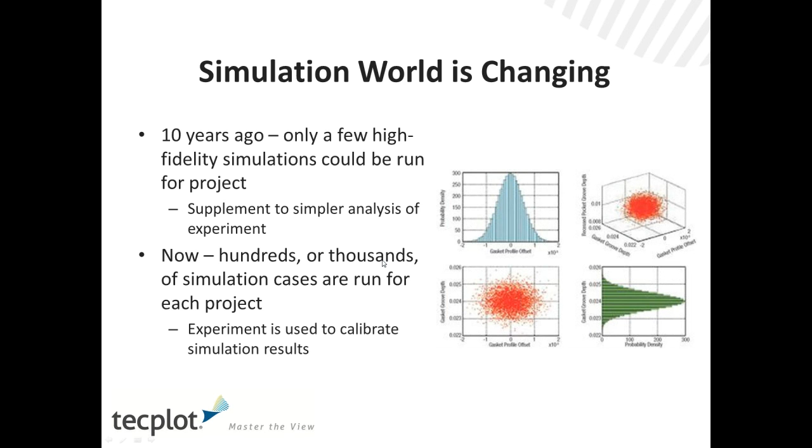And this poses a very different problem to what we've been dealing with in the past, because we grew up with a different paradigm, looking at one result, and trying to apply those basic constructs to aggregates or ensembles of results is something that's somewhat new. And that's an area where we've been doing a fair amount of work to try to see if we can help make that process more facile.

So in that context, there's really been two main applications of the simulation that we're speaking about today. The first is more production-level CFD. In production-level CFD, what we're seeing in the industry is primarily around performance prediction and/or optimization. So in this context, a lot of people are actually trying to predict performance of a vehicle in advance of building it, with the idea of saving a lot of money as one can make some design decisions early on in the process, which have huge implications downstream when you start to think about the overall project costs.

So in essence, what people are doing are looking at velocity spaces, configurational spaces, to get flight characteristics or to get performance characteristics of any type of vehicle, which is slightly different than perhaps exploratory CFD. Now, in the context of exploratory CFD, we're really looking at people who are trying to optimize conditions to get a very accurate solution. This could be anything from evaluating CFD codes, code parameters. We have seen a fair amount of people doing grid resolution studies as well.

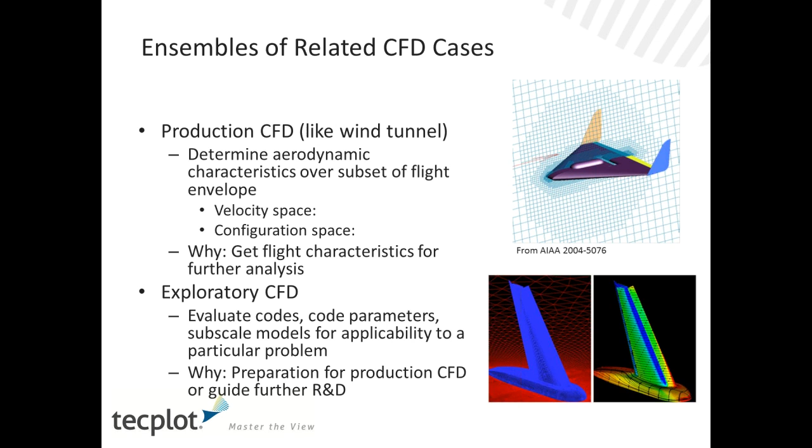The big difference between the two is that in the context of exploratory CFD, although there are several results one might be looking at, you're really trying to do comparisons of accuracy around a given set of initial conditions, or a smaller set of initial conditions perhaps, than what you might be doing in production level CFD. But the end result is you have tons and tons of data. What we want to help you do is pull out the data from all of the information that you have. It's really those needles within the haystack that help you understand how a system is performing. And that's really the goal of what we're going to talk about here this morning.

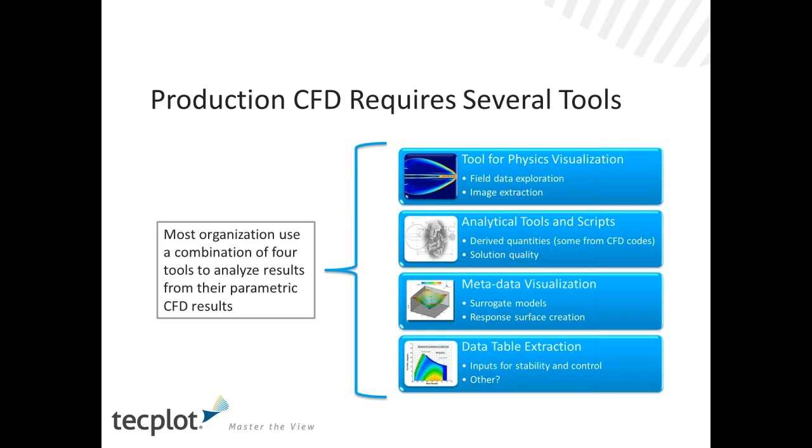So this is kind of the way people are applying it today. We've been thinking there's got to be a better way. So we've developed an application called Tecplot Chorus. And Tecplot Chorus is a framework to manage CFD projects with multiple simulation runs, with tools to evaluate the resulting metadata, and I'll actually walk through this.

But the three main components, physics visualization, analytics around metadata, and project management, are really the cornerstone, so to speak, of what Tecplot Chorus provides. So really in the context of simulation analytics, which is the coupled analysis of detailed flow fields and the associated metadata or integrated quantities and other descriptors. And those consist of anything from visualizations to data management, statistics, and data mining. We'll try to touch on each of these pieces as we go through.

So the first thing we're going to talk about and actually demonstrate and walk through in our two use cases will be how to create projects directly from raw simulation results. We'll show you that it's very easy to bring that information together. And in our use case, we'll walk through one starting from raw results directly from a table, and the other will be actually from a set of directories where the data live.

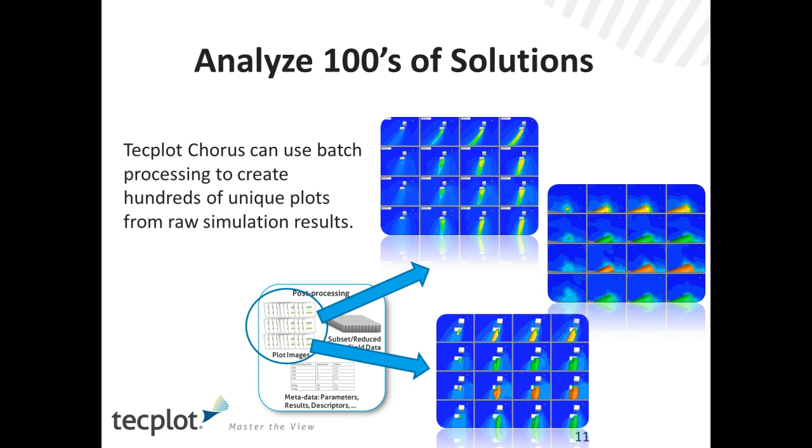The thing we're going to show you is that once you are dealing with those aggregate solutions, those ensembles can be analyzed like they were one, but you can do that on 100. So that allows you to be much more productive, and I'll show you that it's relatively simple. You can actually go through and do that.

And then finally, or probably most importantly, is comparing those results, both qualitatively and quantitatively, to understand effectively what the differences are. And you can see that ranges from doing simple visual comparisons to qualitative image differencing to ultimately looking at quantitative differences of the actual CFD solutions. We'll walk through a couple examples of that as well.

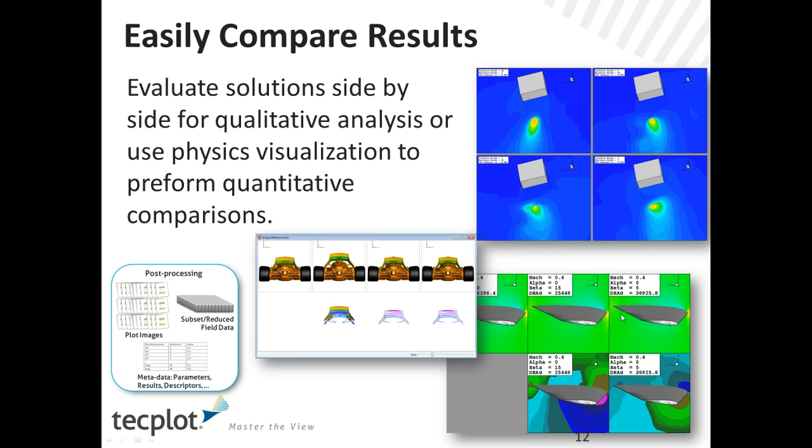At the end of the day, though, you want to tie back to the integrated quantities. Those integrated quantities typically are going to be around using surrogate models as well as response surfaces, and ultimately being able to take that information out into a table that then could be shared with an additional group.

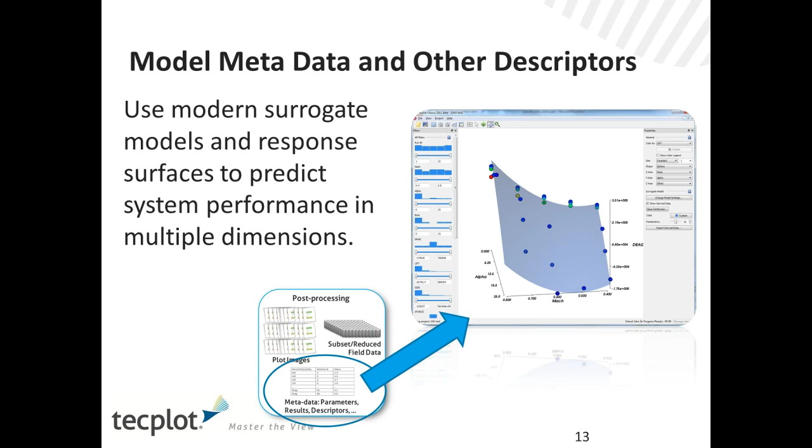So basically what Chorus is going to provide, and I'll show you in this example, is the ability to tie together physics and integrated quantities into one environment so you can make a decision based on holistic information. And it's that ability to understand what's driving the physics that allows you to make a better decision.

In effect, it's like having a hyperwall on your desktop. And for those of you, perhaps, I think we have a couple from NASA. In effect, Tecplot Chorus provides a mechanism to do much of the work you might do with a hyperwall like out at NASA Ames. And we'll show you that you can actually evaluate sets of results very quickly on your desktop.

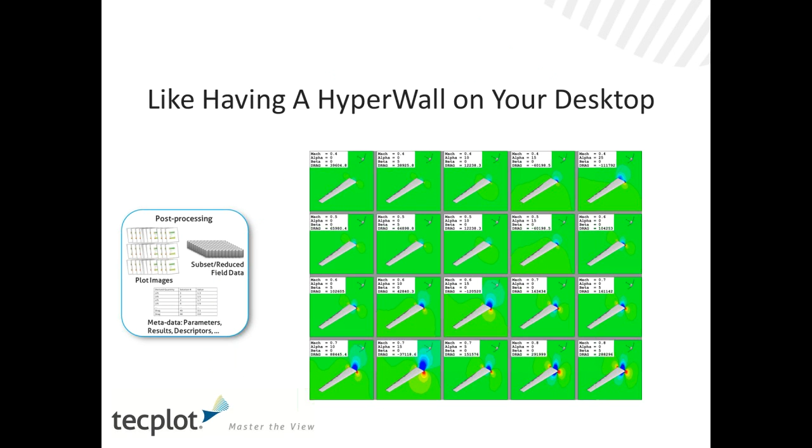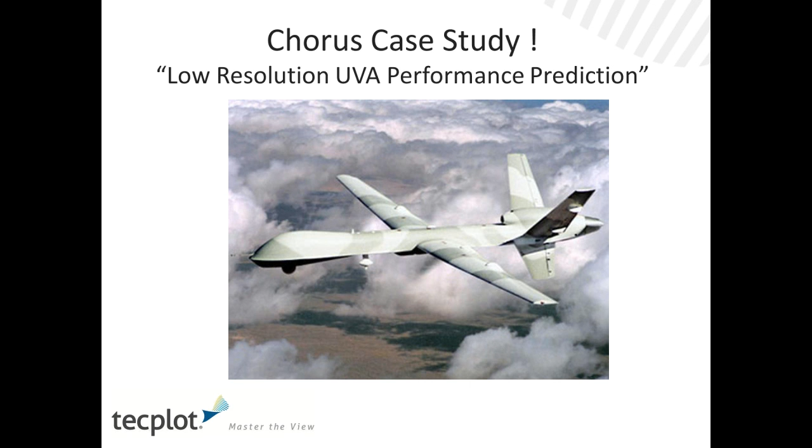And our first use case is going to be looking at a low-resolution UAV performance prediction study. The primary thing we're going to be looking at here is to understand things like alpha max, and we're also going to be looking a little bit beyond its flight envelope. We're going to be looking at higher speeds than this particular vehicle will fly, but you can start to understand what the net impact of trying to fly at those higher speeds will do.

So the background on this, we really are looking at high-fidelity simulation, although the resolution of this particular mesh was somewhat low. But using high-fidelity simulation to predict performance early in the design process has been shown to save quite a bit of money. So as organizations look to computational resources as a mechanism to, in effect, drive some of their design work, they're trying to use these high-fidelity methods early in the design process.

Now, as engineers, of course, we need to develop methodologies that the design team can use to test these potential configurations. So the tools and processes that we're trying to develop in this case are around how does one analyze a set of information to help understand and drive perhaps this performance. And this is one of the reasons why we've seen such an increase in the number of simulations in a given project, because people would like to be able to do some initial performance calculations prior to even making a final decision on design.

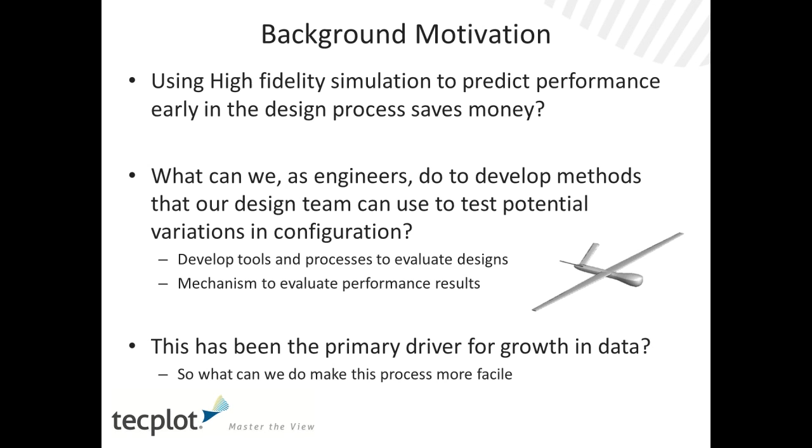So the data, as I'll show you very quickly, we're looking at about 34 cases, each related to the UAV I show you here. I actually have it upside down, but I wanted it to look a little bit more like the image. And what we'll be looking at are the integrated quantities, lift and drag, and we'll actually be trying to model the drag surface. So the summary, we're going to show how it's relatively simple.

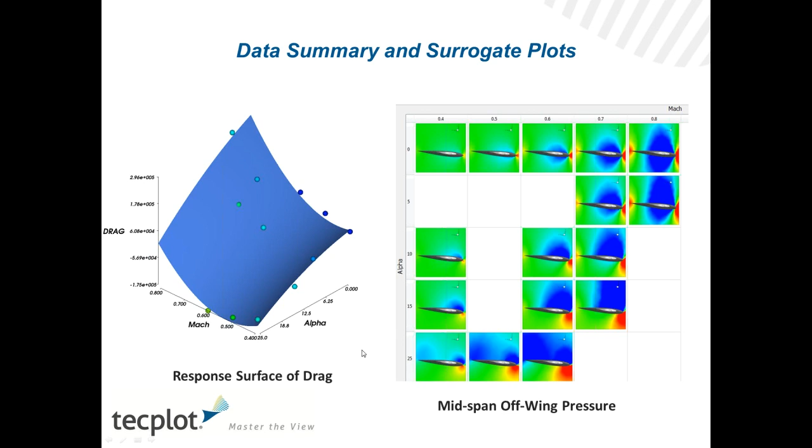We're going to pull together the information into a project. We're going to analyze the results by creating a series of visualizations and other analytical strategies to evaluate system performance. And ultimately we're going to show you how easy it is to actually create a report.

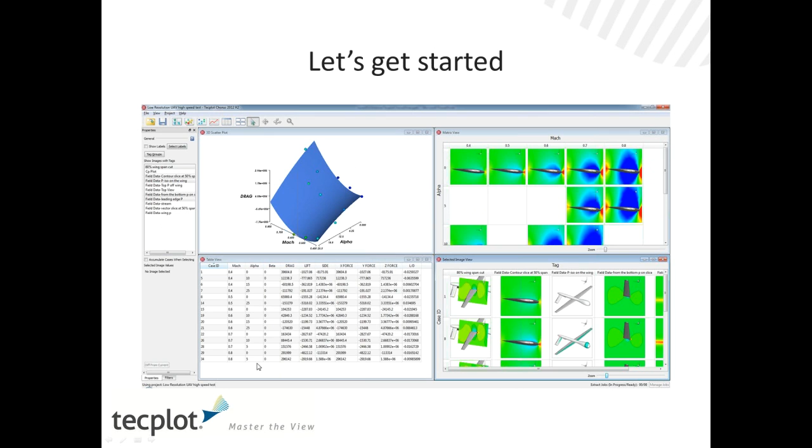So we'll create a project, we'll develop some assets for comparison, identify key characteristics like alpha max, and then we're going to show how you can create a report. So let's go ahead and get started. And with that, I'm going to exit PowerPoint momentarily, and we're going to go into the actual use case.

Now, some of you may have faster or slower bandwidth, so I don't know how quickly this is going to update, so I will try not to go too quickly. As I said, the recording of the actual use case for both of these will be available shortly after the webinar. You'll be able to go through then and take a look at each of these, and if you want to go in more detail, there's a little more detail in those walkthroughs.

So the example we're looking at here, you can see we're looking at Mach numbers that range from 0.4 to 0.8. And for each Mach number, we're looking at a series of alphas from alpha 0 to alpha 25. And within each alpha, we're looking at betas from 0 to 15. So it's not a true orthogonal array, but the basic concept is similar. And for each one of these, we have a volumetric solution, a relatively small volumetric solution in this case.

The idea here is that for any one of these, one could access the data and analyze it using Tecplot 360 for physics visualization. And what we've seen in the industry, and for those of you who perhaps have seen some things on Chorus before, is that for the most part, people analyze one, perhaps drop in a slice, look at the pressure, and then say, okay, that's my basic view, and then they'll try to write a macro that effectively would do this.

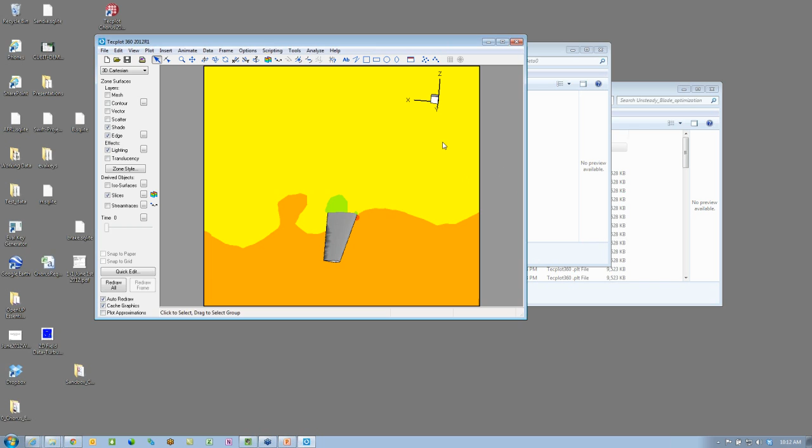And doing it in that method can really lead to some issues around path and other dependencies, especially if you're running on a Linux system. If you don't have all the dependencies in your script taken care of, when you try to run it again, it may not work. And so we're trying to address how one can work in a smarter way with Tecplot Chorus. So let's take a look at this system, and we're going to start by creating a project.

And the project that we're going to create here is going to be based on, let me just move this over, the data we were showing you just a second ago. I'm going to create a simple file to put the information in, and we'll call this 22 here. Doesn't really matter. And the project, we'll call it low-res UAV. And we're going to use a file crawl, and we're going to browse out to the directory. The directory is on my desktop, and this is the same directory we're looking at.

And the next thing we're going to do is identify those independent variables. Those are the initial conditions. You can see we have Mach, alpha, and beta. And I'll very quickly just pull that directly from the directory structure. Now, you don't have to do this, as I'll show you in use case 2. You can actually have an index file as well. So it really depends on how you set up your project. Gotta make sure we spell that right. And then we'll take beta as well.

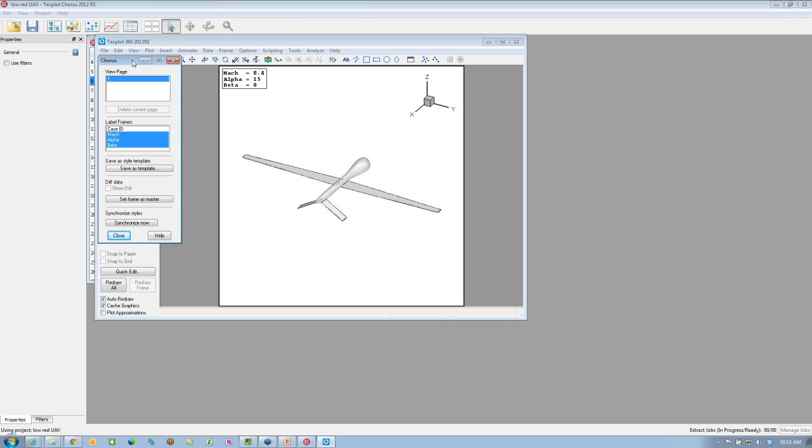And we'll bring in that raw data, and now we can operate on one as if we're operating on all of them. So as it loads in information, you can see that we have links back to the independent variables. And if we apply a simple style to this, perhaps adding a slice, let's see, why don't we put a slice close to the nose cone here.

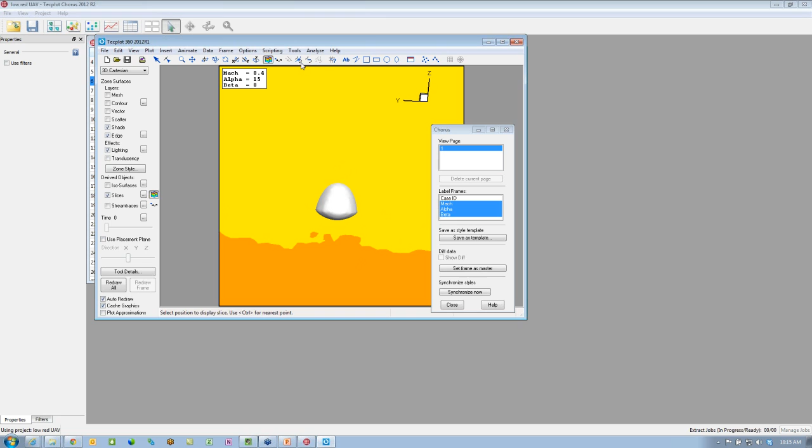And we're looking at pressure on this slice right now, but if we decided that this was a view that was interesting to us for whatever reason, and perhaps we'll add some additional contour levels, we want to see the pressure coming off the nose cone, we can then save this as a template. Now the great thing about this is we can call this nose pressure.

And once we have access to this new template, if we go back into Tecplot Chorus and grab any one of these files or any one of these cases, we can hit view data and take advantage of that new template, nose pressure, and hit OK. And what will happen is it will actually push that information over.

So you can see that in this case we have a relatively high beta. We're at a beta 15. And that kind of bears itself out if you look at the pressures on the nose cone. If we go back to the original case, so you can actually pop back and forth, almost looking at it like two different slides in a PowerPoint deck. So it's a good way for us to start. We're starting to see how the system behaves.

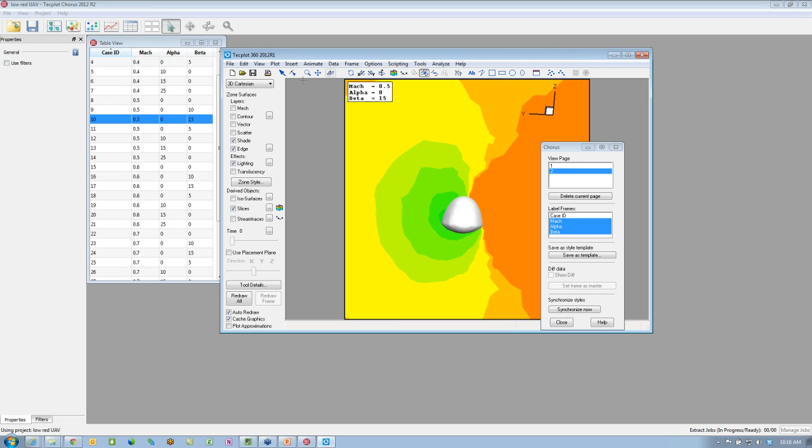The next thing we want to do is we want to actually use that methodology to develop a set of assets that we can build into our project. So we're going to grab all of our results and we're going to create an asset, an image, based on that nose cone pressure, and we'll hit OK. And what Tecplot Chorus is going to do now, it's going to manage the batch creation of those, and looks like it didn't grab all of them, but that's not critical for this moment.

Okay, as it's creating those images, we're going to go ahead and look at a few solutions side by side. So we want to look at, say, both the high alpha at 0.4 and 0.5, and actually, heck, we'll look at 0.6 as well. We're going to view those data. We'll use the same strategy by looking at the pressure coming off the nose cone. And now we're going to open up those three results in one environment because we'd like to do some comparisons. So I'll make this a little bigger for you.

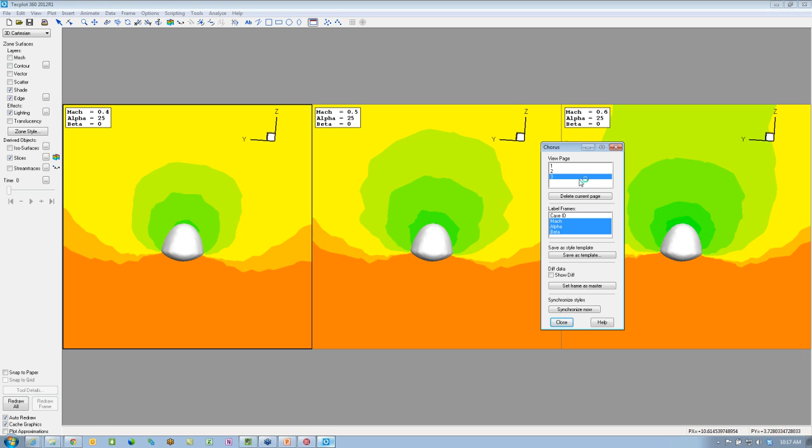Okay. So what we have here then are three results, and they're all tied together. So if I rotate or zoom around, you can see kind of how the system is behaving. Maybe what we want to understand is the only thing that we've changed here, in addition to the alpha being constant, the beta is constant, so the Mach number is what's changing. So we'll understand what change you might see from going from Mach 0.4 to 0.6. So by grabbing one of these, I can actually show a difference.

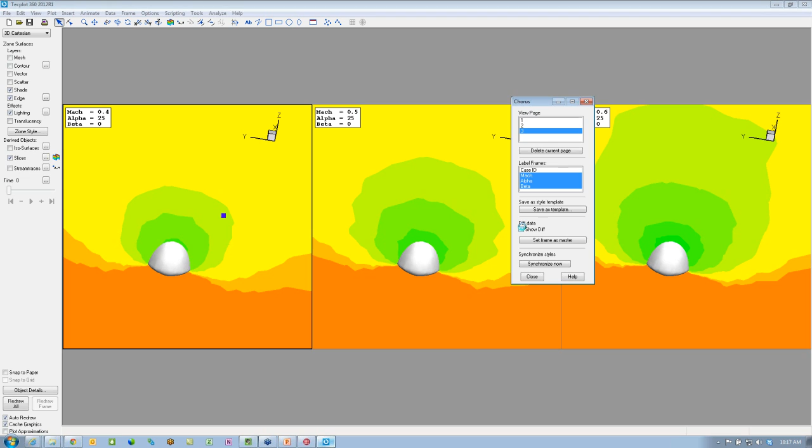So now we're going to do a quantitative difference, and we're looking at now the delta in pressure in the bottom two between the base case or nominal case at Mach 0.4, and 0.5 and 0.6. You can see that there's some fine structure. In essence, the differences are being washed out, perhaps by our contour levels. And we can add some additional contour levels that will help us identify that fine structure. And the great thing about this is that, again, without any real scripting, one can actually apply those styles across.

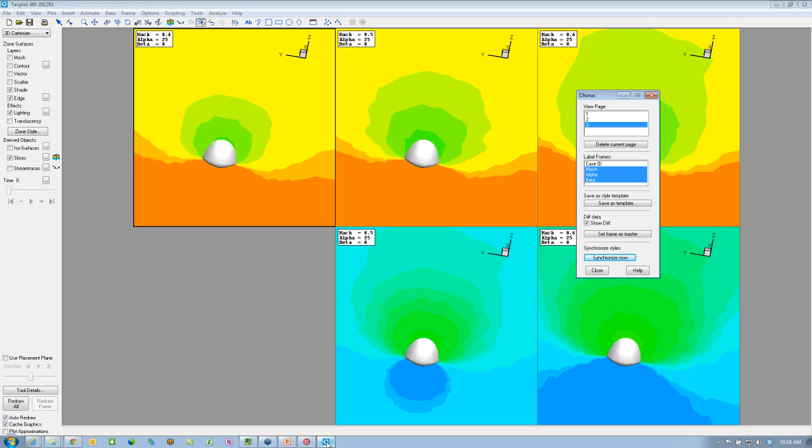So now we can start to get some idea of the qualitative information. Just looking at the deltas, we can start to see what that pressure difference is looking like. But at this point, we've really only talked about qualitative information, and we need to bring in some of the quantitative information or integrated quantities so we can understand system performance. So let's go back here, and you can see that the job is complete. We'll hit deposit.

We're going to put that asset into our system, and if we go now and look at a quick view of the data, and this is a matrix view, what we're looking at now is for the different alpha, going from alpha 0 to 25, and we're also looking at Mach number from 0.4 to 0.8. And you can start to see what the net impact is of that change. Now, I only have one asset here.

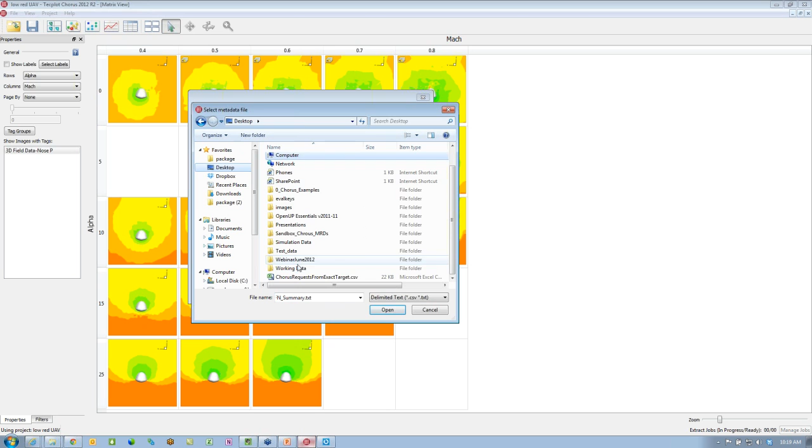The last thing I'm going to do actually is append the data. I'm going to bring in the integrated quantities, and we'll just do that using a text file. And the data are on the desktop. You just need to browse to the text file in question. This can be kind of an index file in principle. And so let's just go in the right directory. And you'll see there's something called results. When we hit open here, you'll see that it brought in some information. Oops, let me go back here. Sorry, wrong one. There we go.

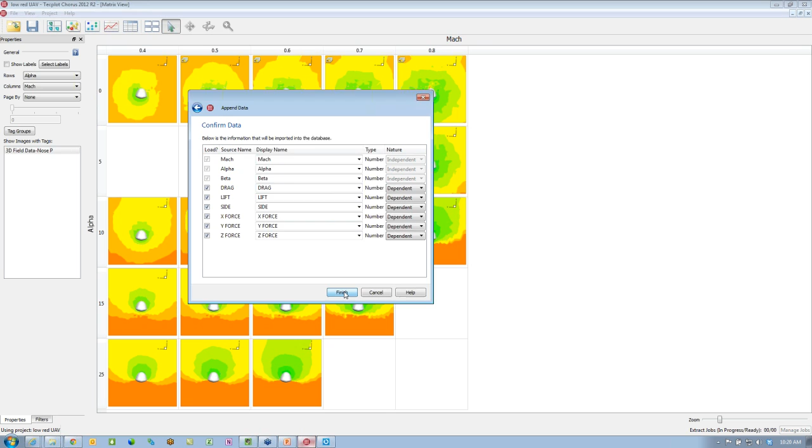So in essence, we're looking at drag here. This is the drag polar, and we're going to fit that using a simple surrogate model. Okay. Once we bring that in, we can show the surrogate model, and you can see what the fit looks like. Now, since we're using a simple quadratic response surface, we can get a basic sense of the overall fit by looking at the R-squared value, which in this case is about 0.92, which is not great.

If we wanted to improve the accuracy, we could limit this to just one beta value. So we'll go to a single value filter. And that should improve the fit nominally, and it did a little bit. There's also some points over here you can see that look to be unusual. We can quickly take a look at one of them, or look at them together. So we're going to view the images.

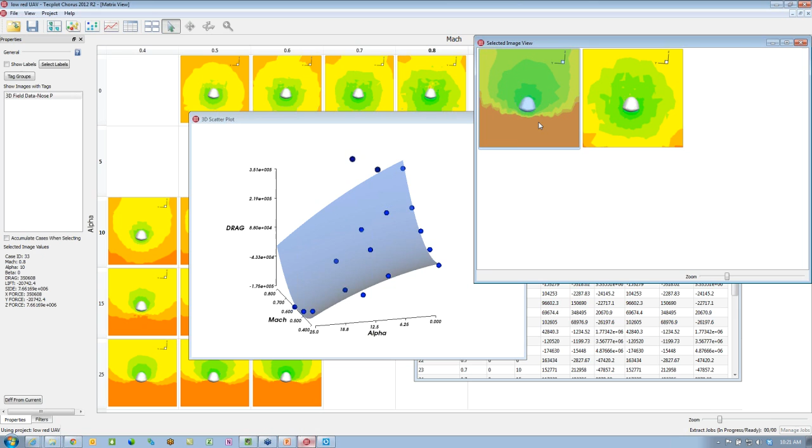Okay, so we're starting to understand why we might see this high drag. There's definitely a difference in pressure here. What we might want to do is see how different they are from a nominal case. So if we look at one of the more well-behaved cases, we can actually accumulate that across. So now we have those 3 images, or 4 images. And we can start to look at differences from the nominal case just by doing a difference.

So this is a qualitative difference looking at the pixels, showing you that in fact you can look at a whole bunch of different views of the data that will help you get kind of a qualitative look at how things are changing. So it's very easy to do.

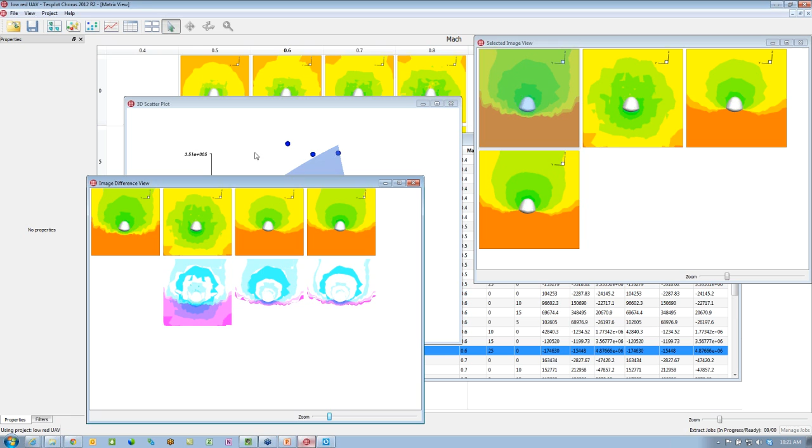Now there's a number of other images that I'd like to actually bring in. So what I would do effectively is come in here, grab all my cases, and I'm going to create some additional assets. Now, in the interest of time, I've already done that, and I will go ahead and open up a project that I've done some work on. And this is actually a very similar case. It's actually the same data, but I've run through a few more images.

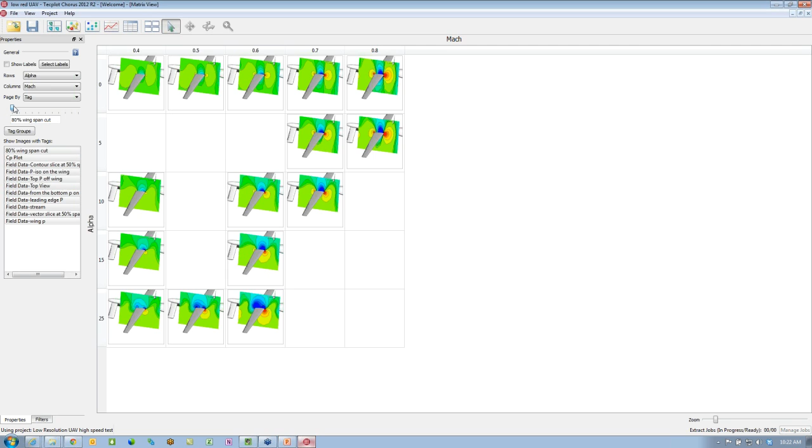So let's start by looking at that same plot that we showed a moment ago, and we're going to quickly take a look at all the different assets we have available. And you can see that we can look at anything from a cut at 80% of wingspan. We can look at the CP plots. So now we're looking at qualitative and quantitative information. We can look at a slice at 50% of wingspan. We can look at the pressure isosurfaces coming off the body. And we can start to walk through very quickly and see how the system is behaving.

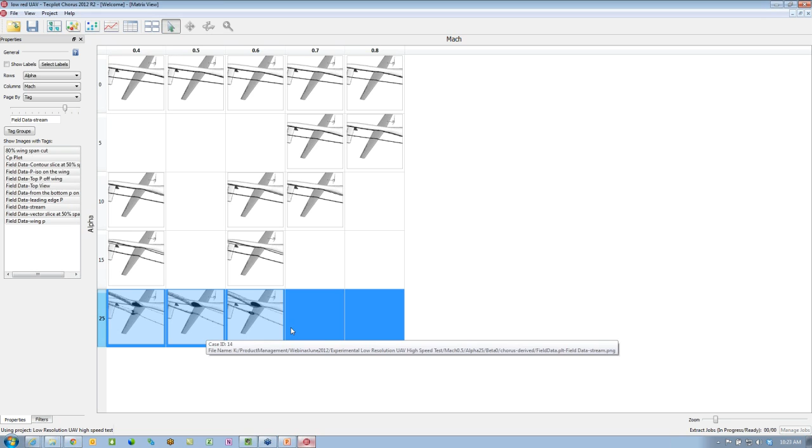And one of the things to point out is, as you might expect, at the higher alpha values, we actually do have stall, and you can see the areas of recirculation here by looking at some stream traces coming off the wing. So it's a very easy way to try to identify. So it looks like in this case, although we didn't run any values between 15 and 25, by 25 you actually are past alpha max, and if you looked at the overall lift, it would go down significantly. Okay.

So there's a couple questions about grid. There's two things to point out. In this particular case, we use the same computational mesh. If we had a different mesh, Tecplot Chorus can certainly handle different meshes. When you do a quantitative delta, the data today needs to be the same mesh.

We're working on some strategies to apply some interpolation methodologies that would allow you to do quantitative deltas based on different meshes. So there's been a couple questions on that. But as of today, you're really limited, at least initially, to the values or the meshes that are the same. So, okay, let's go back quickly.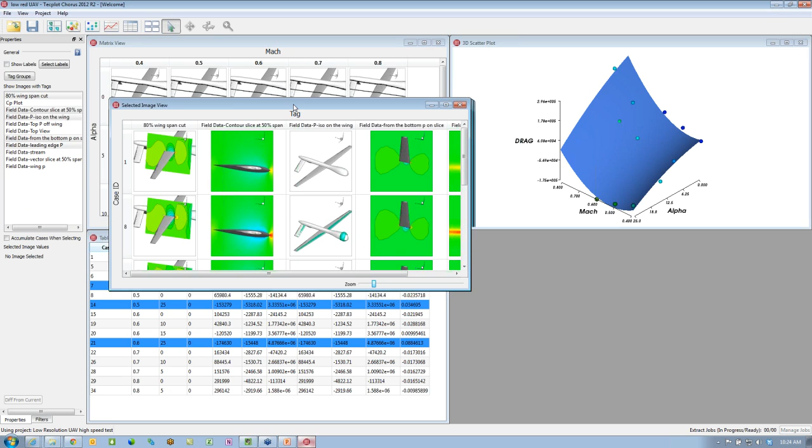The other way that one can actually evaluate these data would be to evaluate multiple views of the data based purely on the case ID. So in this case, we're looking at a number of cases that we've selected, and we're looking at just some quantitative information. We're looking at 80%, 50% wingspan, as well as the pressure isosurface. And as we go to those higher alphas, in this case, we can actually turn on some labels to make this easier to see.

What you'll notice is that as we go to those higher and higher Mach numbers, of course, this plane really does not fly at Mach 0.8. I think it would be very unstable, frankly. But the idea being that you can really start to understand how things are changing.

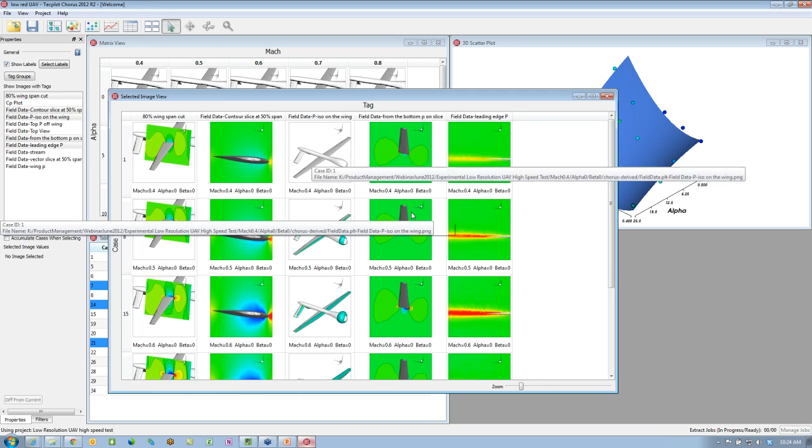And this whole concept of being able to look at multiple physical views and quantitative views of your data of each case is somewhat unique to Tecplot Chorus. And the fact is you just don't need to do scripting. You can kind of walk through this very simply.

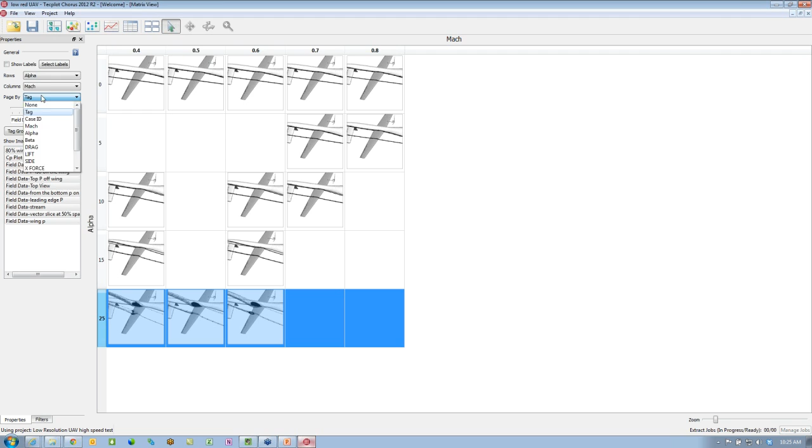Similarly, if we go back to our matrix view, you're not limited to looking at independent variable space. You could actually look at tag space. So for example, if we chose to look at the net impact of alpha as a function of tag. So instead of looking at Mach here, we're going to use tag. And then we can actually walk through Mach space.

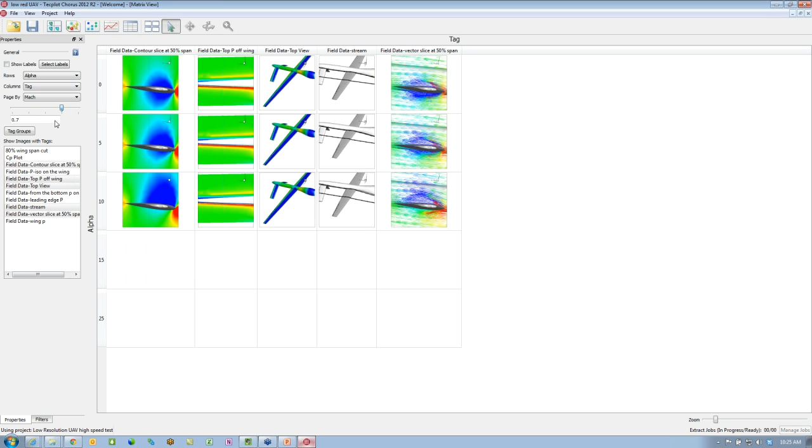So as you can see here, we're looking at a number of tags, and we'll limit this to just enough on screen. So now we look at the tags, and we're going to walk through the Mach numbers. So as we increase Mach, you can see what the net impact is to the performance of the system. So it's a very easy way to evaluate performance or look at overall operating conditions very quickly.

And it's an interesting thing that your eye kind of picks up some of the changes, like at the high alpha. When you go to about Mach 0.6, you'll see that you have this very discrete low pressure area. And in fact, if we look, you'll see there's that recirculation, so it's consistent. So this is a very simple way to evaluate system performance. In this particular case, we're using a UAV.

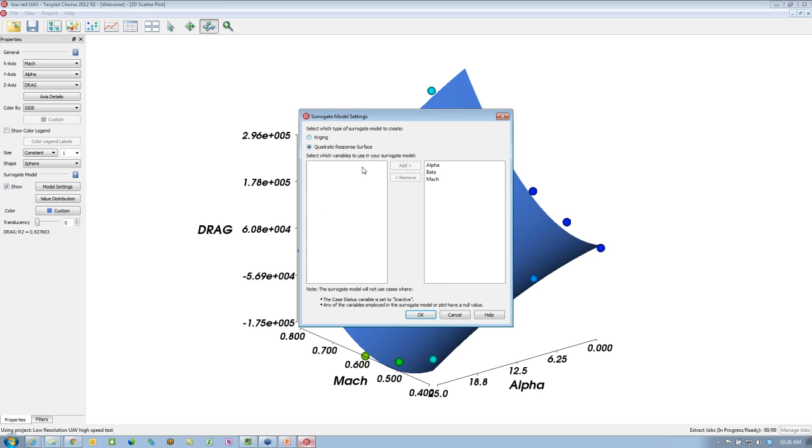Now, up to this point, what we've done, I think, is helpful. But if we were going to deliver to our customer what they need to be productive, we're going to look at the overall drag. This is the surrogate model through drag of a subset of the data. And we may actually want to take these data out into a file. We can actually use either quadratic response surface and/or kriging. And we have the capability of taking this out in two ways.

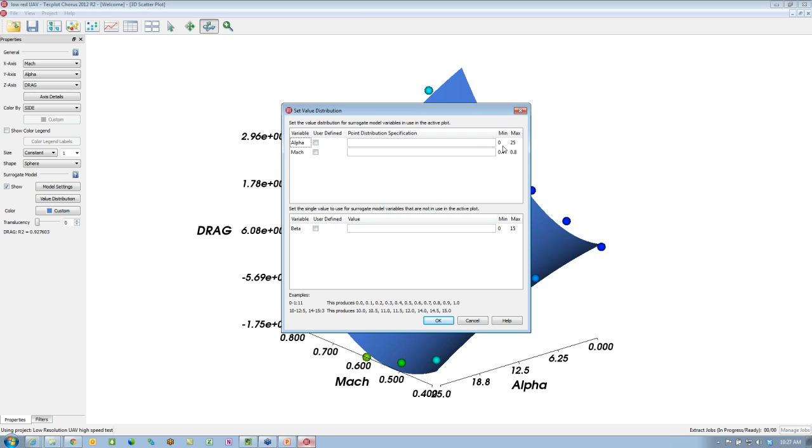Now, one way, of course, if we just look at this as an image, I can just right-click, save this directly as a plot. And if I save it out as a plot, I can then bring it back into PowerPoint or what have you. So that's certainly one way to do it. The other thing, of course, is you can take a look at what values you want to use. So you can actually use a simple way to limit the data. So if we wanted to look at perhaps between 0 and 25, but perhaps we only want to go up as far as alpha 5.

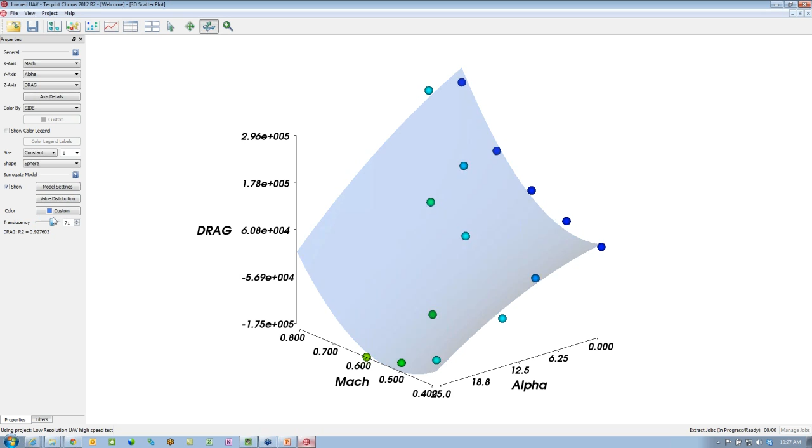So you do have a way of, in effect, taking this information and really changing the view on screen, including everything from transparencies. You can also, of course, from a project, export this. You can export the data to a CSV file. I'm not going to do that here today, but you could then take that CSV file, which is basically just the fit information, and then give it to someone who might need to use that information as set points or start points for another analysis.

Okay. The other thing we're going to look at is how you might want to take these images. So one thing when you're doing a report like this, if you did want to look at these high Mach numbers at an alpha 0, you have the ability now to look at a set of images, say these 3 cases, and we can now export these images collectively.

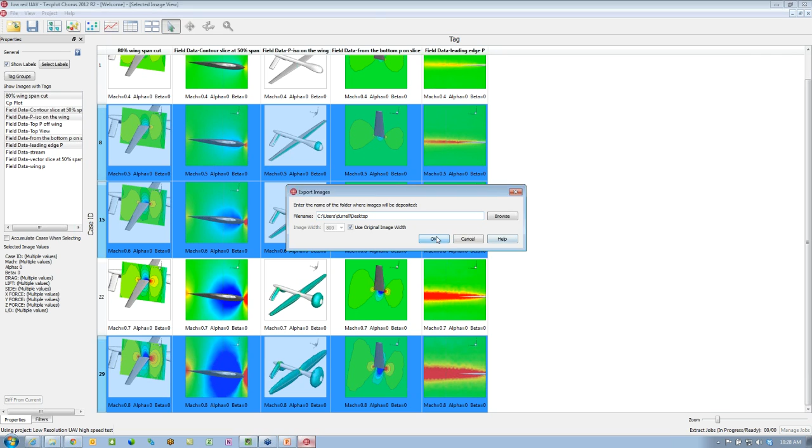And if we say where we want to put them, I guess I'll put these on the desktop, or actually perhaps I can put it in temp. Let's just try that. I guess we need to have a directory there, but anyway, we can export these directly to the desktop. And what will happen is, if I go to my desktop now, you'll see that we have all those images available, and there's just one of them here. Okay, and they actually include the tags, so it's quite nice if you want to bring these into PowerPoint. You can actually walk through each of the images that we have.

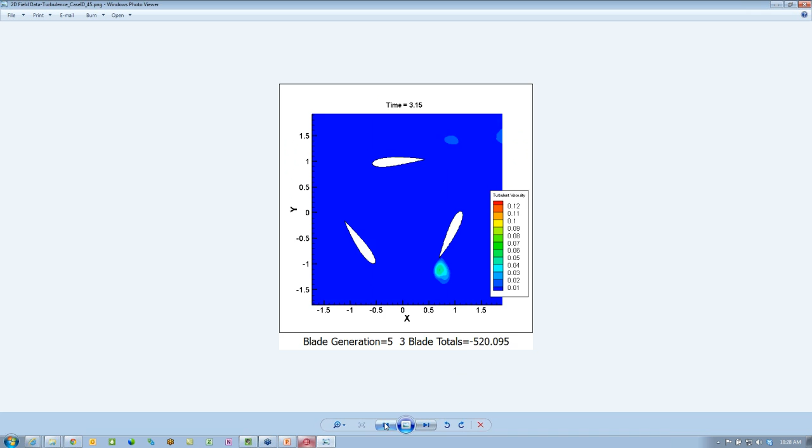So from a reporting standpoint, if we go back to this particular use case, we may actually want to bring out just a couple of these images, so you can actually select an image and copy it directly to the clipboard, which allows you to go back into PowerPoint, perhaps generate a new slide, and we can go ahead and just drop in that image. We'll just make it a little easier to see. Okay, and let's try changing the layout here so that we just have a side-by-side comparison.

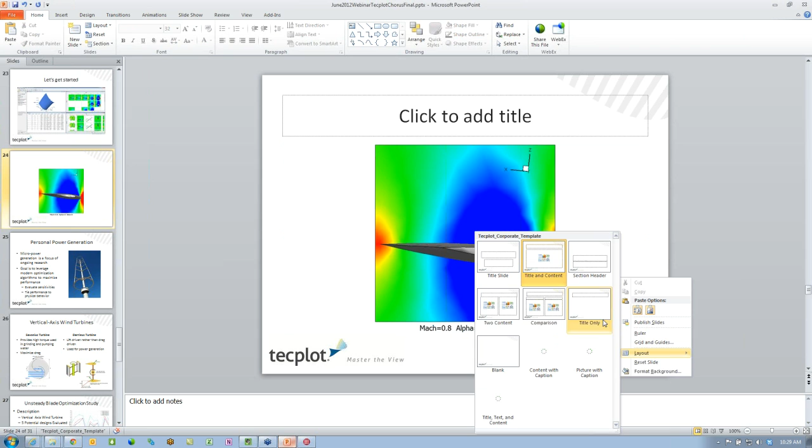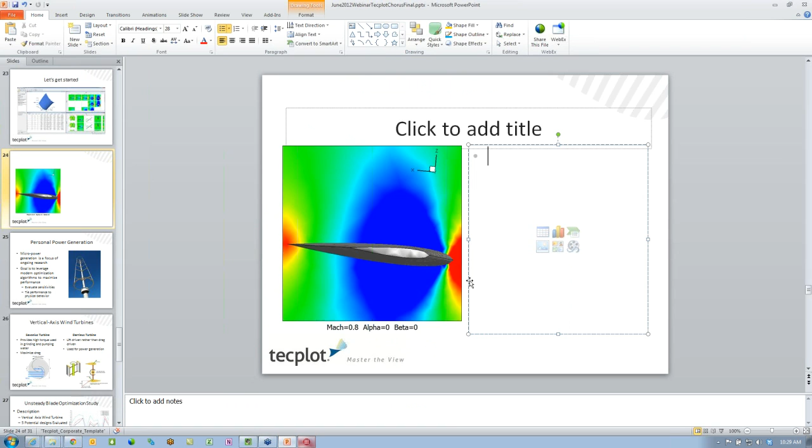And then we can grab a second image here. We'll go back to Chorus, perhaps one that doesn't show that delta in pressure. And now we can copy that directly to the clipboard and similarly drop that in. And it's a fascinating thing that PowerPoint behaves the way it does, but okay. And then,

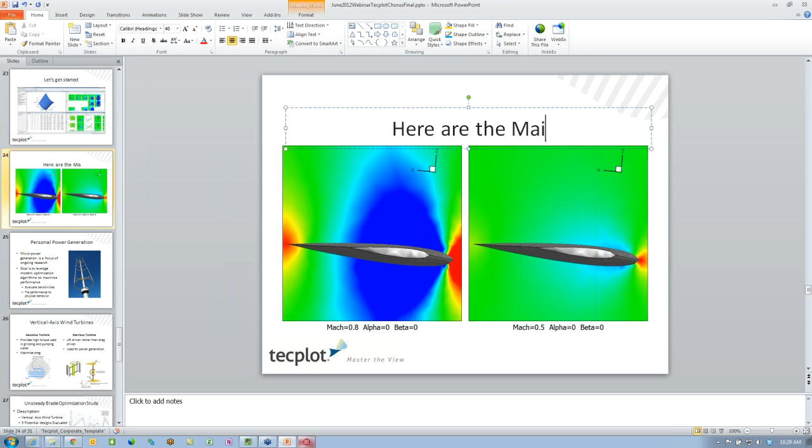so you could imagine then bringing these into a group meeting, and if we quickly click on this, you'll see that now you can very quickly compare these results. So very, very easy to go from a project to taking those projects out and ultimately using them in a PowerPoint presentation or other report.

And this is another area where we've seen a fair amount of interest, because it turns out that a lot of times when you have hundreds of solutions, it's not atypical to have one or two of them mislabeled, especially when you start to export images because the images look similar. By including the label information here, you can minimize the whoops factor when you're giving a presentation.

So, okay. Are the export capabilities available in Linux? The answer is absolutely. This is not a Microsoft Windows only capability. I believe copy to clipboard, however, is a Windows only capability.

Okay. And so very quickly, if we go back then, I showed you that we can very quickly create a project from raw CFD results. I showed you how to develop some assets for system comparison. We identified the alpha max characteristics by evaluating the overall off-wing pressures and looking for areas of recirculation. And finally, we brought that back into a report. And that's the basics of how one can actually use Tecplot Chorus with a set of solutions directly if they're in a directory structure that can be read in simply.

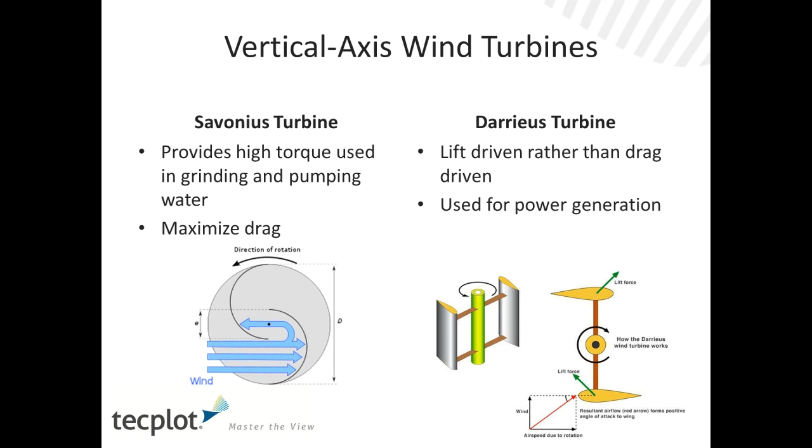In this case, we're going to use the Darrieus turbine, which is lift-driven rather than drag-driven. And this is better suited to power generation than the Savonius wind turbine. So in this particular study, what we're going to look at is the results from the optimization, and we took 5 design points out for comparison. We want to evaluate the differences between the 5 design points and try to understand what are the physical drivers.

So ideally, the goal of this particular study is to figure out, of the 5 candidate designs coming from the optimization based on the constraints, which is ultimately going to give us the highest lift. And we want to quantify what the net improvement is.

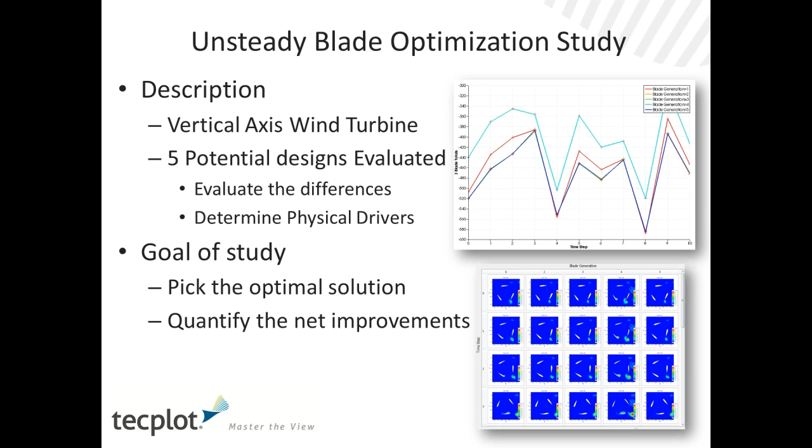So the outline: unlike the first project, we're actually going to use an index file, which includes both integrated quantities and, in this case, links to the actual data. These data were run in Fluent. Fluent does have some optimization algorithms built into Workbench 14. You can actually go through and do this type of work.

We'll also show you, again, how to develop assets for comparison, and finally identify physical drivers that influence the optimization, and we'll try to bring that back in a report. So let's go ahead and take a look at this second use case. So for that, I will go back into Chorus.

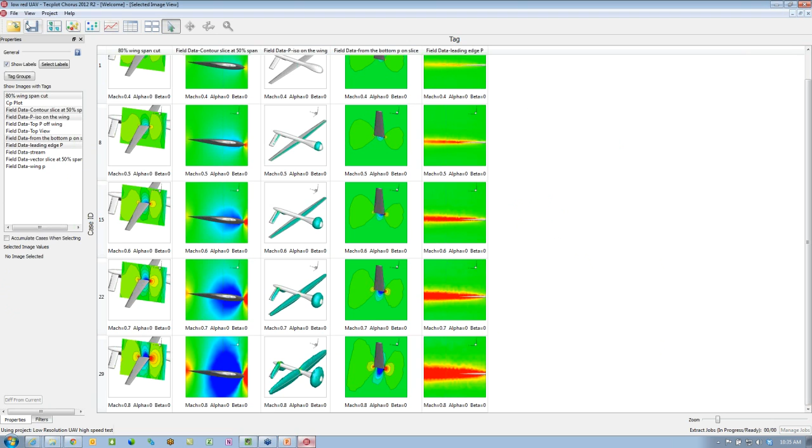Now we're going to create a new project, much the way we did before. Call this 3. And the project is wind turbine. And we're going to use a delineated file, which is kind of like an index file. In this case, it happens to be a text delineated file using commas, but it doesn't have to be. It can really be any delineator you want, from tab to space. And here the output total is just a simple CSV file.

When we hit next, we just have to point it to the directory that holds the CFD data. Unlike the first one, there's actually a file to link to. So this is a file, and this is the file name. And to be consistent with what we did last time, this is the 2D field data.

And we'll also take advantage of the fact that time step and the blade, which in this case is the blade generation, so we'll call this blade number, are independent variables. In fact, those are the two things that we're looking at that are changing. This is the initial conditions. And this is the totals, really for all blades, and that's what you're trying to optimize. These are the individual totals for each blade.

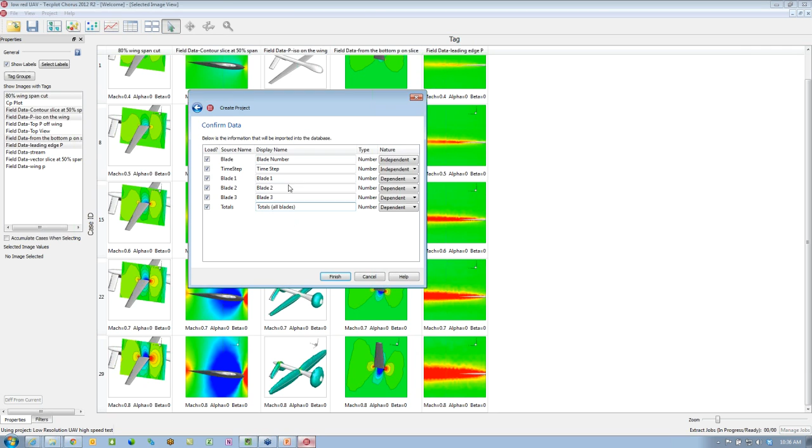So when I hit finish, it's going to create a project based on the information that I gave it. Now, one thing to point out is that for the data themselves, if I hit view data, you have the 2D field data, nothing else. And there's a number of pre-computed style files, but it's not important. I'll just quickly open up one file so you can see what it looks like. So this is at a particular time step.

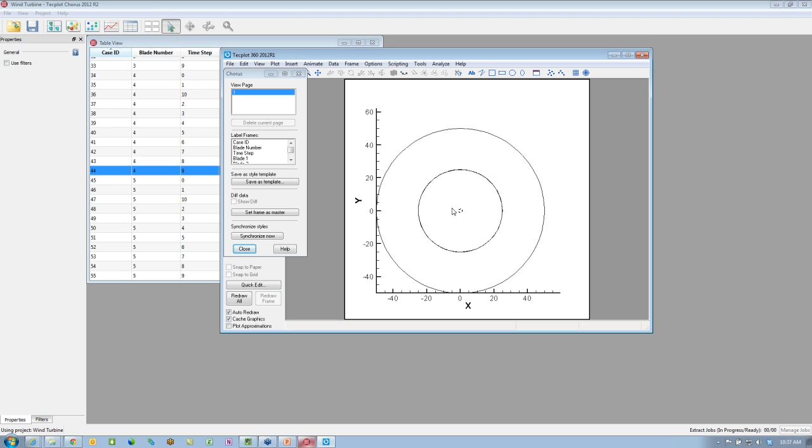What we're going to be looking at is just a simple 2D cross-section of the airfoils. If you zoom way in here, you can see this is the basic configuration. And what we'd probably be most interested in is looking at things like turbulence. So we'll look at the turbulent viscosity, and we'll turn on the contour. So here's the basic view that we want to apply across all 55 solutions.

So again, like the first one, you can set this as a template, and we'll call this T2 for simplicity. We're very interested in turbulence, especially around the leading edge, that might create additional drag. So once we have that template, we can go to any particular generation. If I wanted to look at time step 0, for example, for all 5 blades, one can look at those collectively, and we'll look at the T2, and we'll bring those in.

So now we're actually looking at all 5 of them, and you can see they come in very quickly because they're relatively small 2D data sets. And the idea is we're looking for differences, and you can see a very clear difference here, perhaps a little less so here. We may want to look at the time step and blade number.

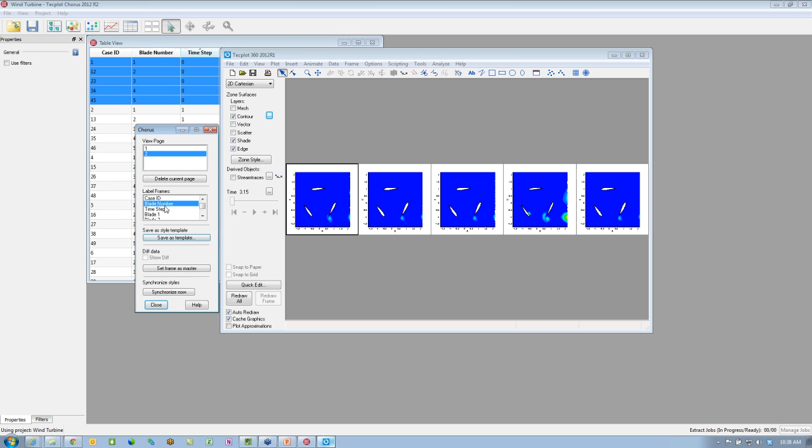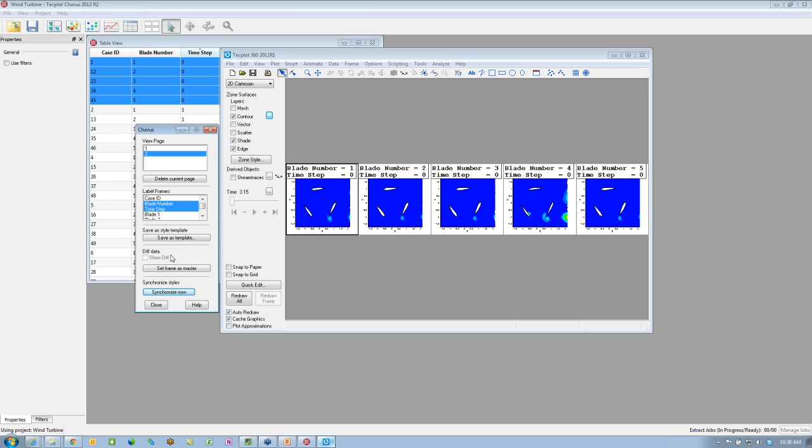Now it's hard to see, so we may want to increase the font so that one can actually see what's going on. So okay, that looks big enough. And if I hit synchronize, it will actually just apply that style across. So it allows me to very quickly understand those changes. Now you'll notice that you can't do a difference here because the grids aren't the same. You can do qualitative differences, and we'll show you that here in a second.

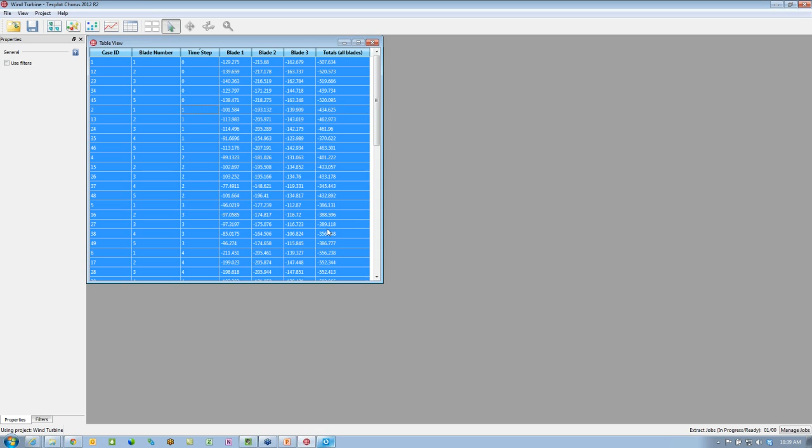So let's go back. In principle we have an image we'd like to create now. So I'm going to create an asset or a set of assets based on my field data so we can start to look at additional analysis. So this is going to run in batch, and a couple things to point out is that Chorus allows you to run multiple batch extractions in parallel. The idea here being that we want to parallelize the batch extraction, especially if you're looking at lots of data. Today that's limited to working on your particular workstation.

The disadvantage of that, of course, is that if you have very large data, you probably don't want to do them all in parallel. You may want to do them serially. We have the configuration files available such that one can say, okay, I only want you to process one at a time. What I've noticed on my machine is anything over 100 million cells, and I'm running on a laptop, 100 million cells is really getting into the limit of my resources. On some of the workstations we have here, we've looked at data sizes on the order of about 1 billion cells. There was another capability about the, okay, well that's okay.

Okay. So as you can see, it's going to process all 55 files, and that should not take much longer now. As I did with the last case, I am going to show you the pie in the oven concept. We're actually going to take a look at a system that we've already done some of this work on. So in the interest of time, and I want to make sure we have plenty of time for questions, I'll go back to my dashboard and load in a session where I've already done some of this work. Okay, it looks like the job's done, but we're not going to wait around for it.

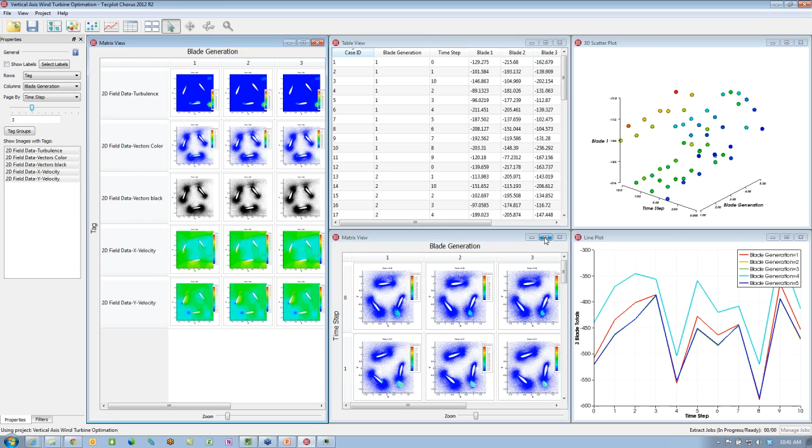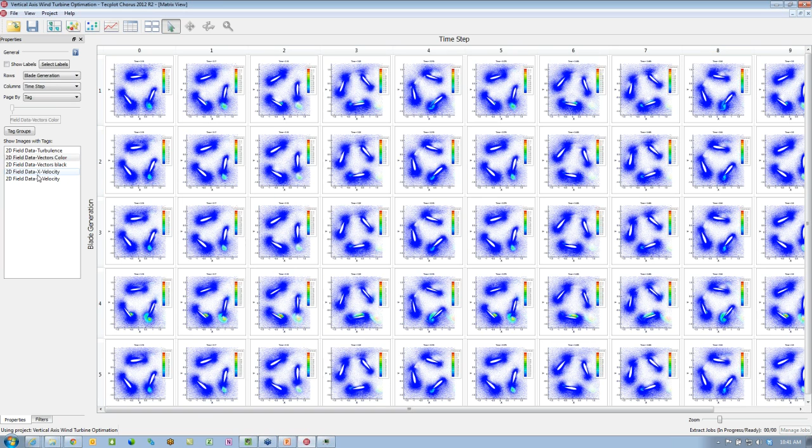Okay, so what we're looking at here is blade generation versus time step. So you can see each blade generation from 1 to 5, and we're looking at time going down the row axis. We're going to shift that around. Let's look at blade generation versus time step. And then we want to take a quick look at perhaps the x velocity, or perhaps the y velocity, and at the differences between the different blade generations.

Now, I showed you that you can't do a quantitative delta, but you can do a qualitative delta. So I'll view these images now for all of the blade generations at that time step. In this case we'll show labels so that it's more clear. Really only care about those two, and perhaps we'll do the total as well. So this is the information that we're making decisions on. What we want to do is take the nominal case, which is blade generation 1, and compare it to each subsequent case. So if we do a difference now, you can see what the net differences are.

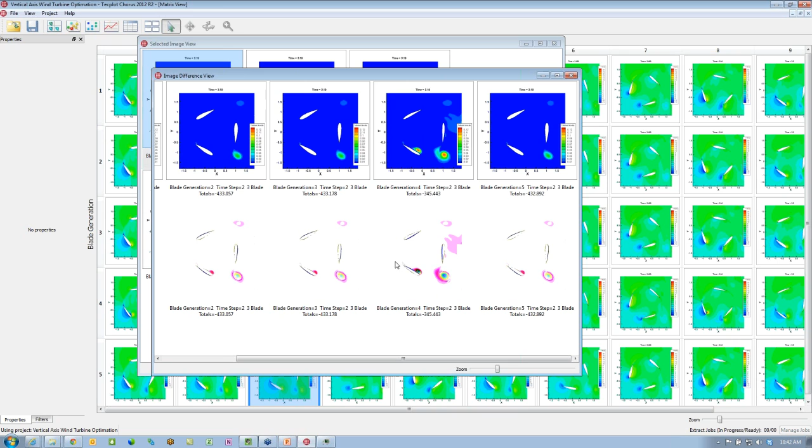And again, the key thing to point out here is that the key differences are actually in the area around the leading edge. Although you can't see that with the naked eye, if you do a pixel difference, you'll notice that in blade generation 4, for example, you actually do see a little bit of turbulence forming on the leading edge of the blade. The idea is we want to move that turbulence back so we can maximize the lift of the system. So this gives us a very simple way to evaluate those differences.

We can also evaluate things like the vectors. Similarly, you can look at the x and y velocity, and you really have a lot of flexibility in terms of how one looks at the data that's shown on screen.

Okay. So this is one mechanism, and this is an easy way to evaluate at any particular time step. Ultimately, though, you want to quantify those results so we can look at the integrated totals as a function of time for each blade generation. So you'll see here we have blade generation from 1 to 5, and what we're looking at basically are those integrated totals. In this case, a lower value is better. And what you find is that for blade generation 4, it turns out to be close to a 30% improvement in performance.

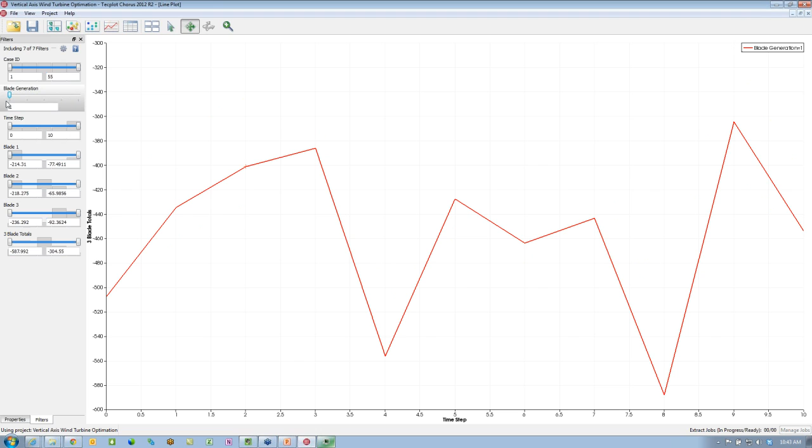Now, if we wanted to, we can use filtering to walk through each one of these by going to a single value filter in blade generation, and now we can actually walk through each blade generation and see how the performance is changing. So we're looking at now more quantitative and qualitative information simultaneously, and that helps us make better decisions. We'll go back to range filter.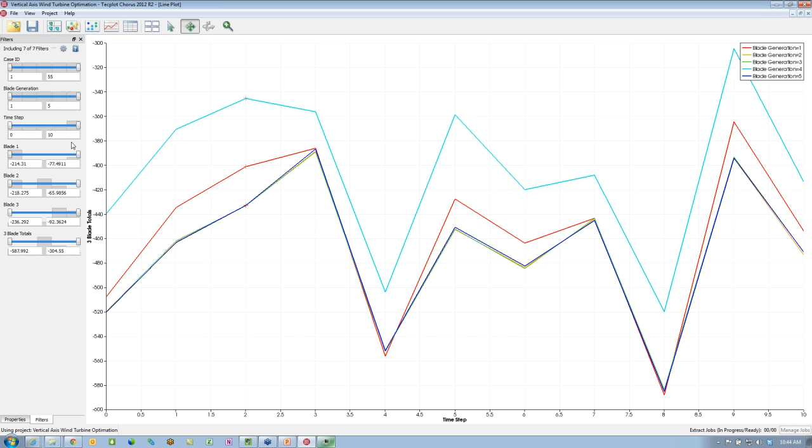Now, if I had included more data points, in this case I brought in 5, but in principle the optimization ran through multiple generations. The thing about using these filters is one can actually look at each individual constraint and expand the constraint to see how the performance changes. And what people have found is that when you start to do that, you start to understand whether or not a relaxing of a particular constraint might actually have an impact on the overall performance of the system. So it's a very interesting way to evaluate system performance.

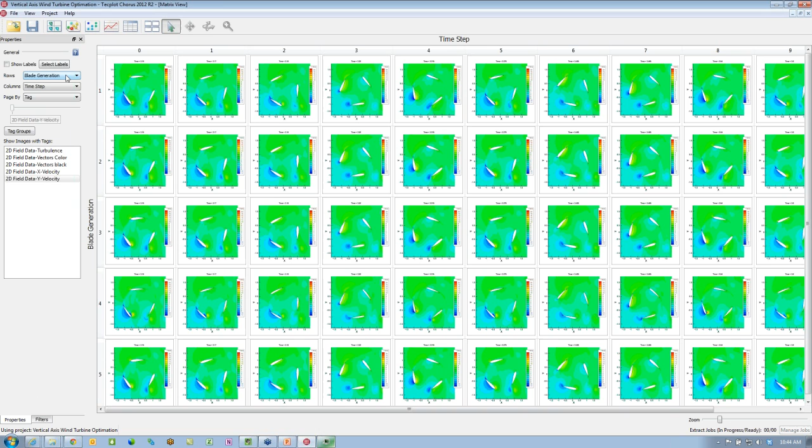Another thing that's kind of nice to do is, instead of looking at time, in fact moving into these directories, you can see we actually have 11 time steps. One might actually want to look at this differently. Perhaps we look at blade generation again going down, and then instead of time step, let's look at tag, and we'll use time step as a mechanism to walk through the system. So here are the different tags, and now I can animate across all my time steps just by walking through time. So it's a very convenient way to evaluate how things are changing in time.

And again, we're looking for this area in particular where, from the nominal case, you see that we actually have some vortex shedding off the leading edge. And you can see that the optimal design actually moves that farther down the blade face, and that leads to significantly higher performance for this system. Okay.

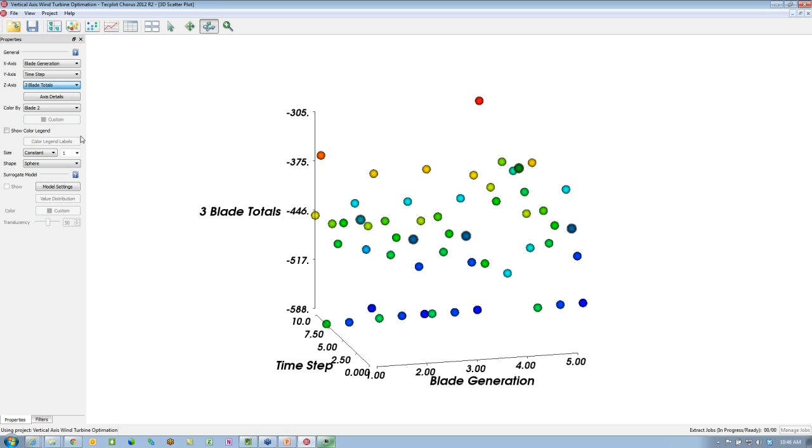So to go back, we talked about, in effect, looking at the data. Here is another mechanism. So this is the results again, blade generation on the x-axis versus time step. And you can see the values of the overall performance on blade 1. But instead of blade 1, perhaps we should look at the overall blade total. And this is going to be akin to what I showed you in the XY line plot. Similarly, I can walk through each of these using my filter by looking at blade generation. And if we use a single value filter, you can actually look at each blade individually.

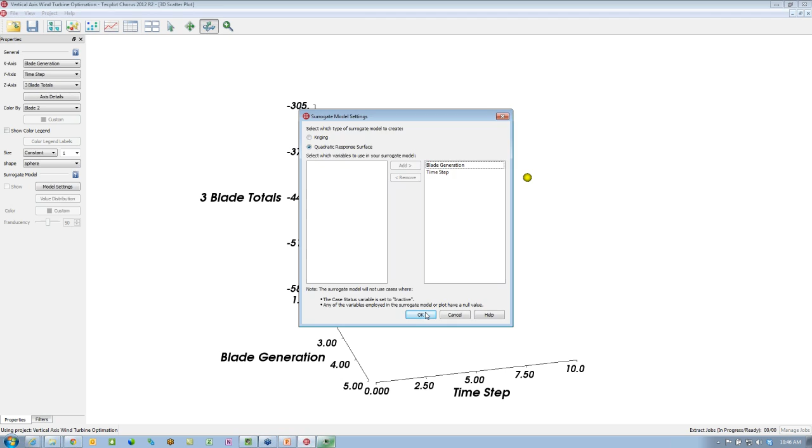And one could apply a simple surrogate model, and it's not going to be ideal given the low dimensionality of these data. But if we evaluated the surface, in effect, it's giving us close to an average. And we can go back and look at those averages, and you can see that for blade generation 1, 2, 3, and 4, it's not all that different, at least on the average here. If we go back to a range filter and go back to our line plot, we'll see that we can apply that same methodology and show the model settings as well. And you can see the overall improvements.

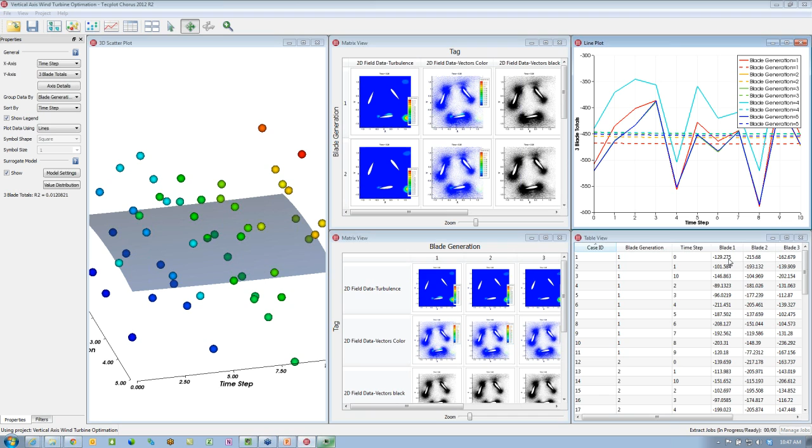So the last thing that I wanted to show you in this case, similar to what we did before, we have a mechanism where we can take this plot out, save it as a plot image, and we'll say this is a PNG directly onto the desktop. And we'll be able to take that information back into PowerPoint.

So we'll pop in, grab a new slide. We'll actually use a different layout where we can just look at two images side by side. We'll move this up just a bit. And we'll go ahead and grab that image directly off the desktop here.

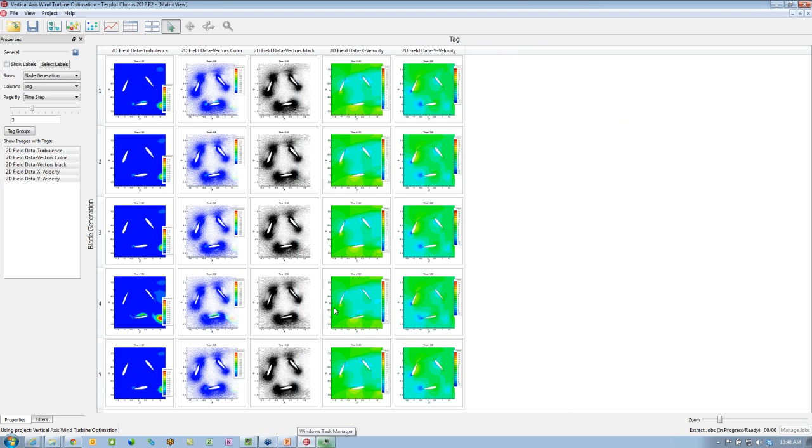So let's see if we can find that image I just created. There we go. So there's the quantitative information that I can bring in for my project. And the next thing I want to do is bring a representative image from generation 4, so let's go ahead and make this bigger. So here's the 4th generation, and perhaps this is the most telling. So I'm going to view that image, and I'm going to copy that right onto the clipboard.

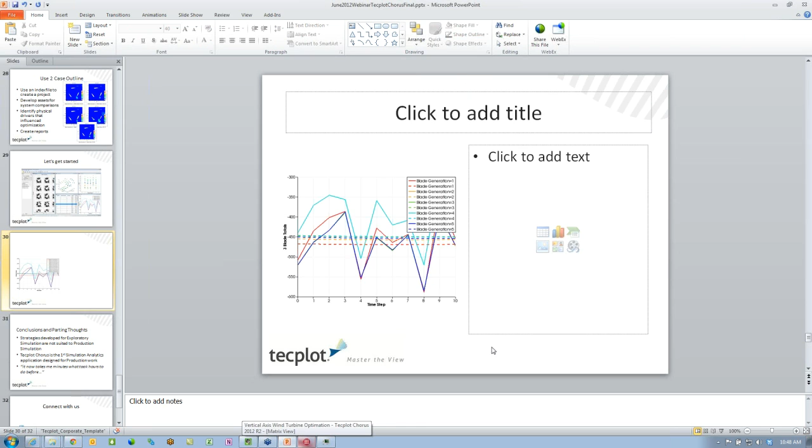And before I do that, actually, let me turn on the labels so we know what blade generation and the totals are. And we'll show those. And then we'll copy that directly to the clipboard, and we'll go into PowerPoint now, and we can drop that image in. Okay.

And we'll go back. So you can see it's very easy then to go from analysis of those results into quantifying the information necessary to make a decision, as well as take out representative plots that show, you can see, we actually moved that turbulence off the leading edge. Okay, so that hopefully gives you an idea.

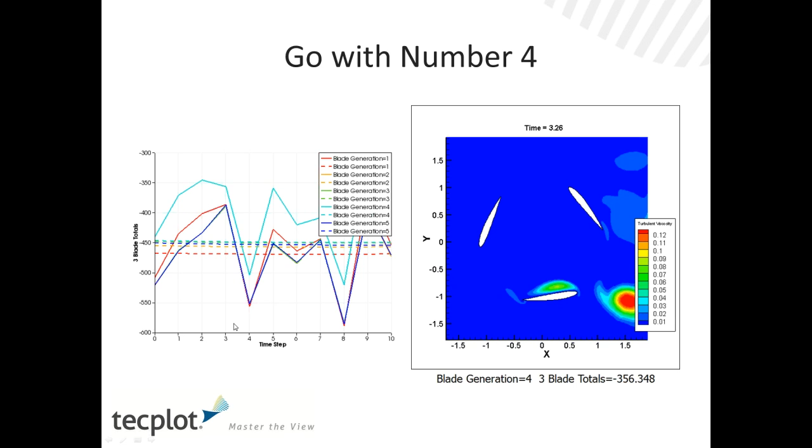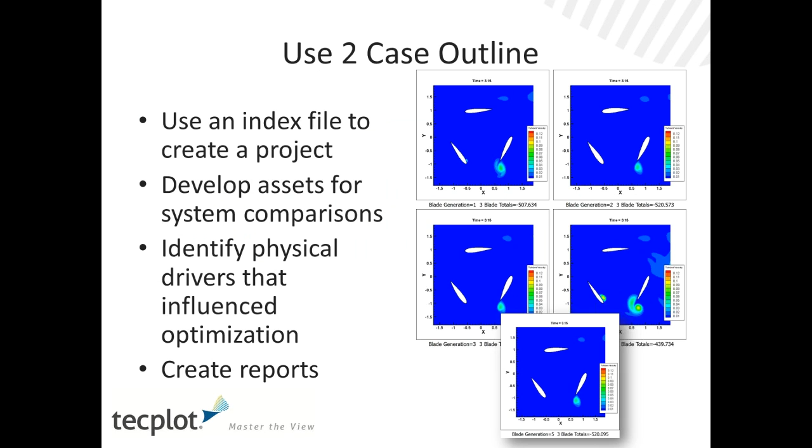We actually walked through 2 use cases, so just to go back to it, the idea here being that we wanted to use an index file to bring in and create a project, which we've done. We developed some assets for system comparisons. Those included images. We also looked at some of the integrated quantities as well. We identified the physical drivers behind the overall improvement in performance. And finally, we created a report, brought that information directly into PowerPoint.

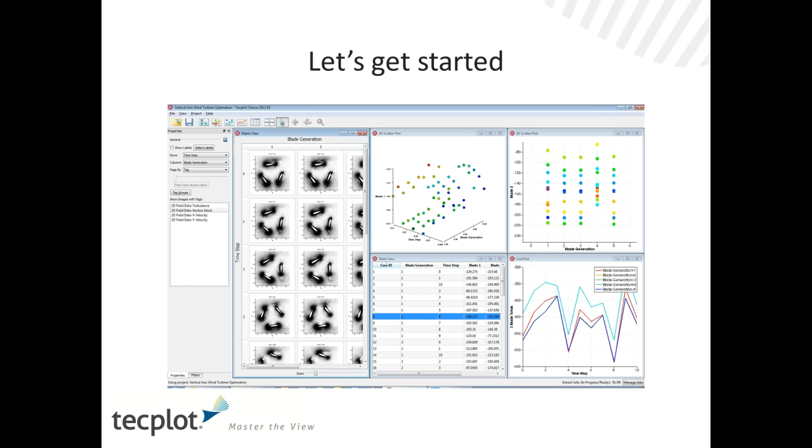And so, as I showed you, we can create these kind of holistic views that help us make better decisions based on overall system information rather than point solution information. Okay. And this is an image.

So parting thoughts. What I wanted to show you here this morning are some of the things that we've improved around Tecplot Chorus 2012 R2. The things that we were specifically looking at are giving you more unique ways to evaluate visually as well as quantitatively assets that are created as part of a project. Those include images, those include data files as well.

This is the first application on the market that allows you to very quickly generate multiple views of aggregates or ensembles of CFD results. And that really gives you a better framework to look at overall system changes and understand very quickly what, if anything, might be wrong with the system. None of the data that I showed you here today failed to converge, but there's plenty of times when you'll look at a system and go, well, that data didn't converge. In such a case, you can actually remove that from your project.

One of the things that we're seeing, though, in terms of overall project setup and analysis, what used to take hours is taking minutes now based on this approach.

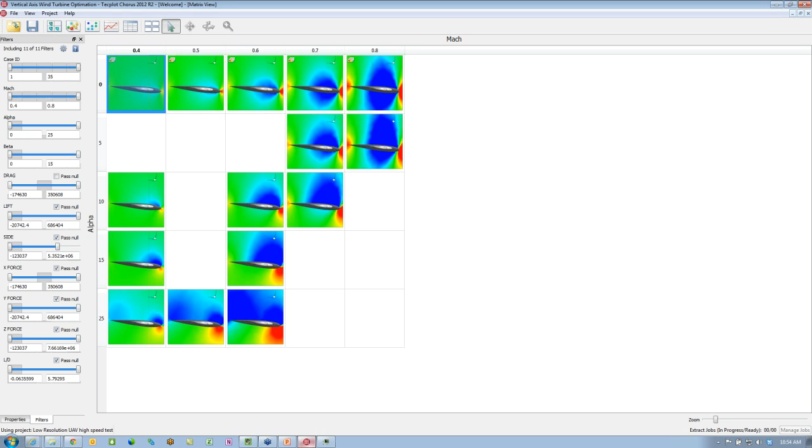The other thing that you can do that is kind of convenient would be to use the tag concept or case ID. So in principle, like you show here, this is actually case ID, which of the 35 cases you can see here. And one of the things that you can take advantage of is you can use a slider to do kind of a single value filter, and then you can see those. In this case, I don't have all my cases selected, but in principle, you can use that to walk through as well. So, good question, but yeah, you can definitely address it in that way.

Okay, there was a question about running additional results. As of today, the way that Chorus is set up, we are building the ability to run additional algorithms or anything outside. So it's almost an API that allows a user to select information from here and right-click, and instead of it asking, do you want to export the images, for example, it would say perhaps create additional cases or rerun case, and you can register your own custom actions, anything from running additional CFD runs to launching additional applications for qualitative or quantitative analysis to launching peer review or anything else you might want to launch directly from this interface.